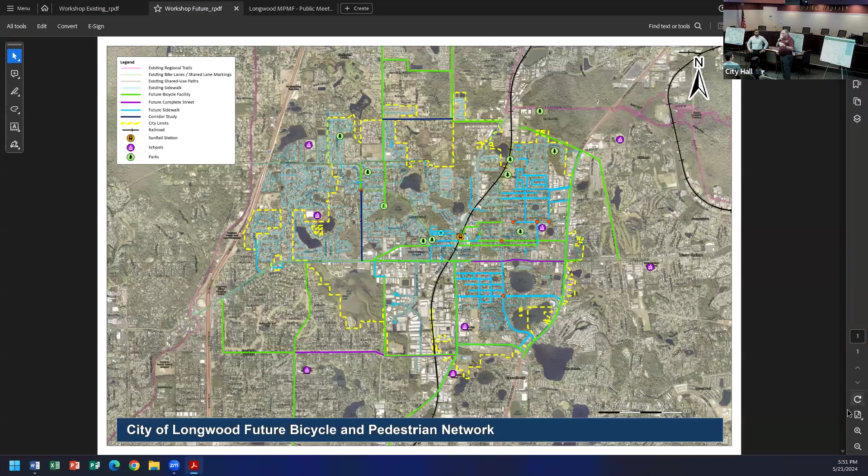But then there's also 2 copies of the mobility plan and one of the mobility fee report. It's a very detailed report, almost 200 pages. So you can look at those 2 at your leisure.

And like he said, we want to, after we're kind of done with some of the presentations, after Lauren speaks, we'll go have a little break before we come back and talk about the mobility fee. We're waiting for the other speaker. And during that time, you can maybe put Post-it notes on different things that you'd like to see or anything else.

One thing I did want to mention is we're coming to the end of our 1 penny sales tax and we're finishing up a lot of projects. So in the next year, probably 8 months, we're going to be finishing up a number of projects. There's some more sidewalk projects that we're doing right now.

In the next 6 months, some of them are, we're doing Florida, we're going to do some on Magnolia, we're doing some different sidewalk over on 14th and 12th. And then we're doing South Longwood Phase 1, and hopefully South Longwood Phase 2, which is basically all the streets from 434 south all the way to Wildmere and even over. We're making some of those connections.

If anybody's familiar, we're adding sidewalks too, and there's some other places we're trying to do sidewalk connections. If people have been around Longwood long enough, they know there's these neighborhoods that have sidewalks, but there's no connection from the sidewalk in the neighborhood to the road, like Range Line or to the church. So we're trying to add some of those little sections in over the next 8 months or so too. I just want to mention that, but I will introduce Lauren.

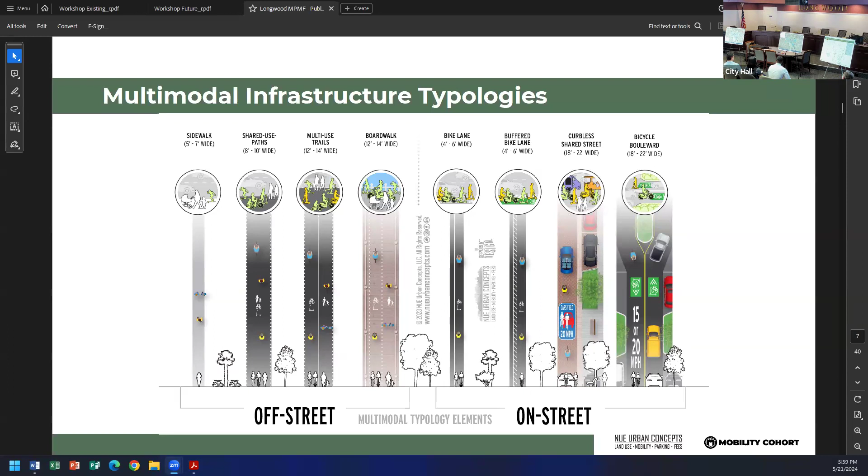And the idea is that between the bike ped plan and the mobility plan, the end result would be a well-connected and integrated multimodal system that allows people to move around Longwood with or without a car.

And so when we talk about moving people, this is what we mean. We've seen a wider and wider variety of mobility devices and ways in which people are moving around cities these days, and we want to encourage that. We want to accommodate that because when we do, it makes for a more sustainable and a safer street environment for everyone.

But it also provides more independence for people that otherwise wouldn't have much independence in a car-focused society, right? So we're talking about people with disabilities. I actually lived in the Netherlands for a few years, and one of the most striking things to me was that it's not just bikes using all of the bike lanes. People who would otherwise be very dependent on others to get around now have mobility because you're providing multimodal facilities for them to use.

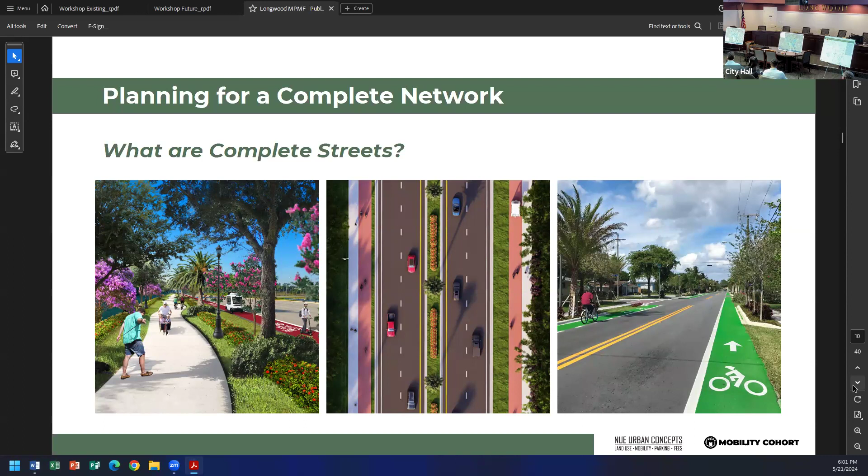And so to get into some of the proposed projects, we did include a few projects that had been already identified on state and county roads through other plans. Those are mostly included just to emphasize those projects and to show the importance of the connectivity that they create for the multimodal network. So you have what we call complete street retrofits.

So that would be a street that is an existing street, but it's being reconstructed to add bike lanes, add a shared use path, et cetera. And so there are already some projects in the works for Ronald Reagan, 434, and 17.

In addition to those projects, we've recommended 2 new complete streets, and one is the extension of Savage Court and Bennett Drive. It looks like some of these maps aren't turning out too well on this, so I apologize for that, but I'll get into that a little bit more here in a minute.

We've also proposed 2 additional projects, 1 additional trail project and 1 additional shared use path. We didn't look too much at paths and trails because, as I mentioned, we've incorporated the bike ped plan into the mobility plan, and you guys had already made a lot of great recommendations, so we didn't have too much to add there.

But one thing we did discuss with Shad was the opportunity to add a trail on the east side of Candyland Park. There's some extra right-of-way that could lead from Arbor Dog Park down to Longdale. But it would provide some connectivity and we think could be a nice amenity for the park there.

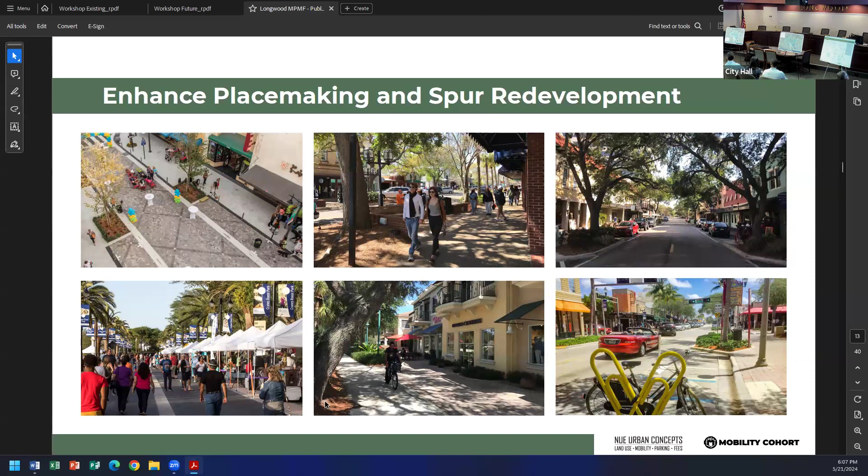So this is what we envision in Longwood. We've proposed curbless shared streets on West Church Avenue and Warren Avenue between West Church and Ronald Reagan, as well as Wilma Street, right outside. Again, this is a long-term plan. These streets are already some of the more aesthetic streets in the city, and they're right adjacent to Reiter Park and the hospital site, which will be redeveloped. We strongly believe, and have seen in other communities, that streets like this can do a lot for redevelopment and placemaking.

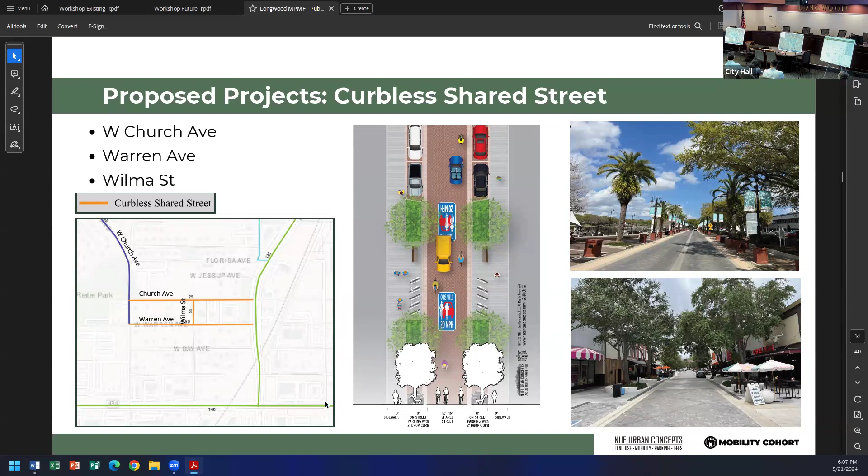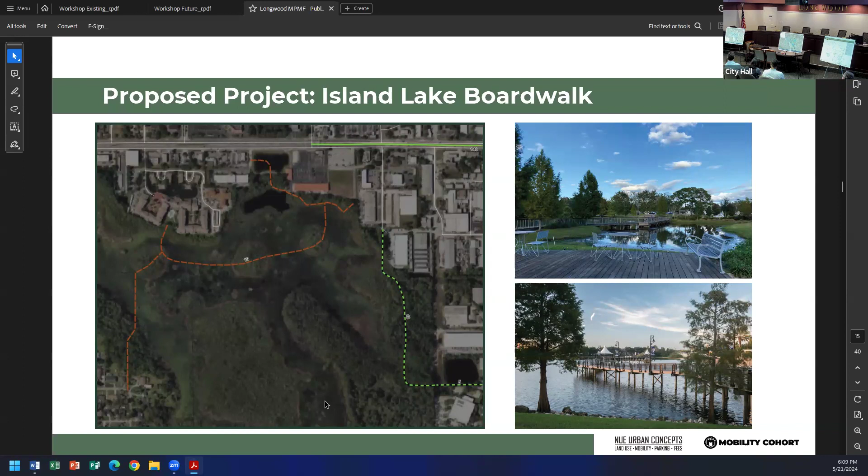The mobility plan also addresses parking. We've included a catch-all project, which would allow the city to develop up to 40 on-street parking spaces throughout the city and in the downtown area.

I can talk about that in more detail with everyone, but some of the idea behind that was that when you are looking to redevelop historic downtowns, the city has parking minimum requirements. And if a small business owner comes in and wants to develop just one lot, sometimes the parking requirements can be a barrier to being able to do that. Sometimes it's difficult to provide parking. So if the city can provide its own parking in the downtown area, then that could be used to satisfy some of the parking requirements. Long story short, that's a big policy barrier with creating more walkable communities.

We've also created a catch-all project that we're calling Strategic Parking Management. This would allow the city to begin collecting funding to address anything from site acquisition, design, engineering, and construction of various parking improvements in the Station Core and Downtown Historic District.

This is accompanied by a recommendation for a next step initiative to do a parking management plan. That plan would look in more detail at what are the parking needs downtown, how can we create first and last mile solutions to the train station, how can we connect multimodal facilities to the train station, and also how can we create a park once environment. By park once environment, we mean when people come into Longwood, say for an event or whatever it may be, they could park one time and use other means to travel around the city.

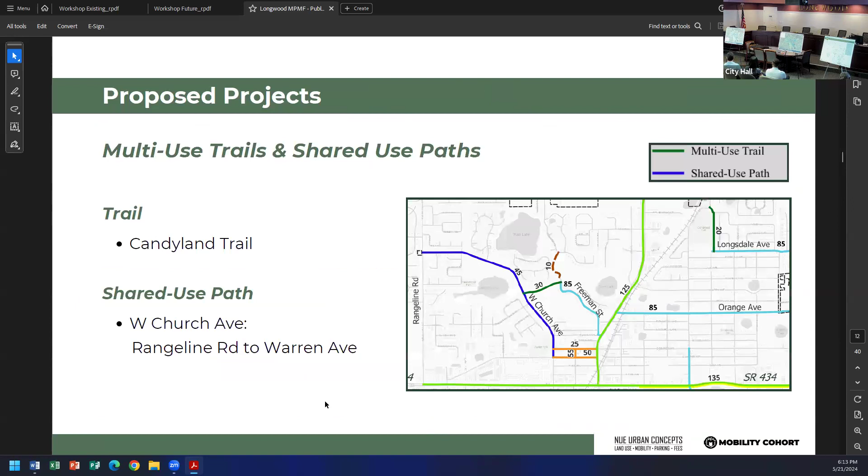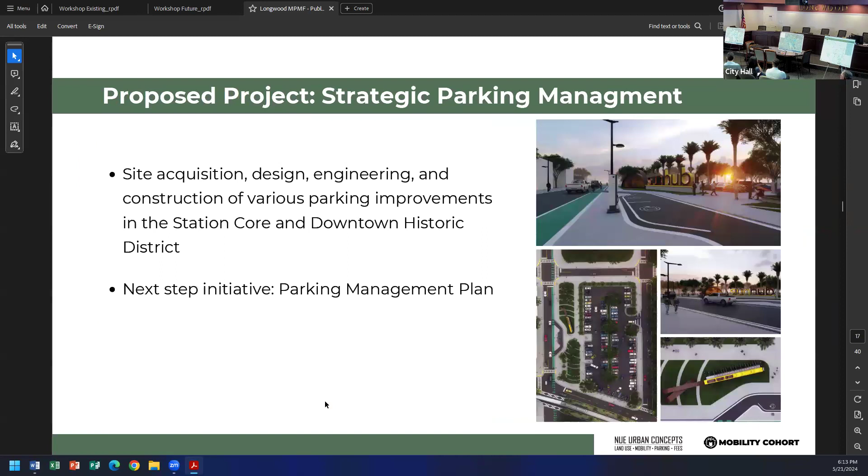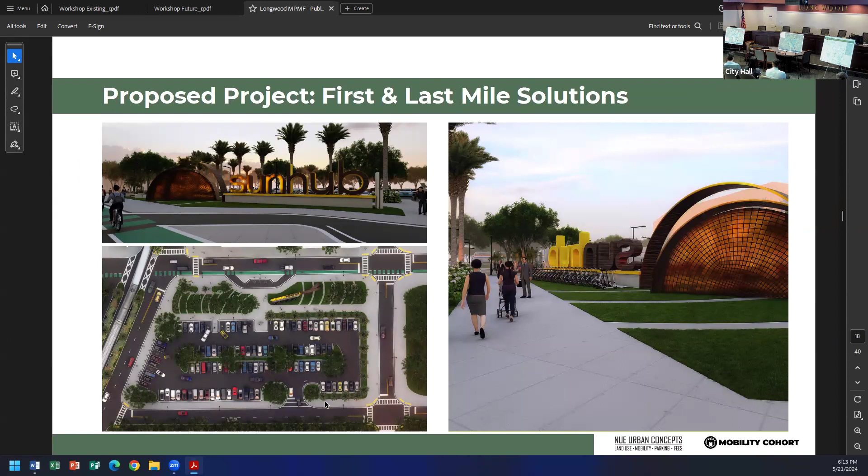I had a picture of it here, but I don't know if I can go back that far. In the bottom right, this is a microtransit circulator. These are becoming more and more popular in communities in South Florida. They're essentially large golf carts, operating as transit services in some communities. We thought that could be a cool idea for Longwood, something that could start as a service for special events, and then as redevelopment occurs, if it's successful, it could be expanded into a more regular service.

We talked about how the mobility plan can be leveraged to create and enhance public space in the community. We have Reiter Park, the historic downtown district, we may have Island Lake boardwalk, and then we also have the train station, the Sunrail area. It's important to ensure these areas are connected to each other and that people can reach these key destinations in the city from residential areas. So we wanted to look at how do we improve the multimodal accessibility throughout the city.

When you look at Longwood on a map and look at the transportation network, you'll notice that in the older part of the city, east of Ronald Reagan, you have a nice gridded street network. West of Ronald Reagan, this is the part of the city that was more recently developed, and you have more of a suburban style transportation network. This is something we call modern curvilinear, with curving streets, dead ends, and cul-de-sacs.

From a transportation planning perspective, the modern curvilinear has some benefits, but from a traffic perspective it also presents issues. When you have less connectivity in your grid network, you're forcing a lot of traffic onto just a few streets, your collectors and arterials. That's when you get traffic, because everybody's taking the same route to their destination, as compared to a traditional grid network where you have many options of getting from A to B. The traffic is more dispersed, and you generally have better traffic flow.

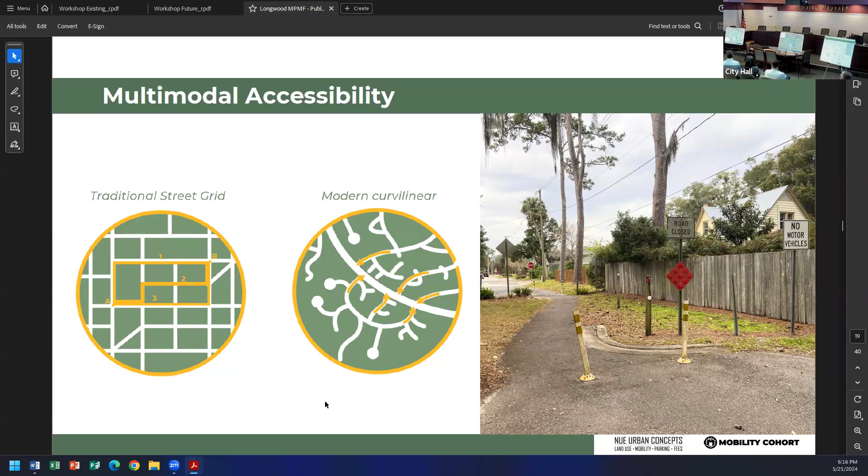The picture on the right is an example I took from Gainesville of what that could look like. So instead of keeping the street or opening the street, you could just put a trail. And I'll show you why that matters. These are two projects we've proposed with that goal in mind.

The first, and I apologize, the map is not rendering very well. Let me see if I have a pointer here. The first project is number 10, and that goes from Bucksaw Place and Hidden Oak Estates to Freeman Street. We've proposed that as a boardwalk.

The reason we've proposed it as a boardwalk is because it runs through some conservation areas. Boardwalks are known for being lower impact development and more environmentally sensitive. So we think this could be a good location for a boardwalk.

If you live in Hidden Oak Estates, or another neighborhood to the north that I don't know the name of, you have to go all the way up to Longwood Hills Road and all the way around to Ronald Reagan if you want to go down to Reiter Park, the train station, or the hospital. That's about 1.5 miles or more drive. If you open up that boardwalk connection, that cuts the distance down to half a mile.

So now you're talking about a walkable or bikeable distance. That was the thinking behind that project, that as this area we're standing in right now redevelops, and as we enhance the area around the train station, we would want to shorten the distances it would take to get there so we can encourage people to bike and walk more.

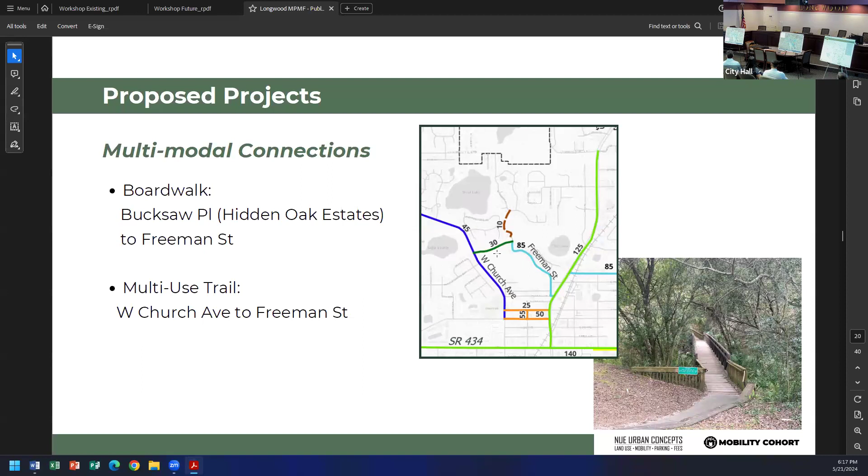So we talked about how the mobility plan creates a framework for innovation and thinking differently about how we design our streets. I know some in the room are familiar with roadway level of service, others may not be. Just as a quick summary, roadway level of service is the traditional methodology that planners and transportation engineers use to evaluate deficiencies, evaluate the roadway system, and prioritize what projects get built. But roadway level of service is focused on service for cars and doesn't pay much attention to multimodal travel, what it's like to be a person walking on the street.

This having a methodology focused on roadway level of service has created a planning system where we are very focused on widening roads and building new roads as a solution for congestion. And what many of you may have experienced in your own lifetimes is that this brings induced demand.

So when you widen a road or build a new road, a few years later you're sitting in congestion again, and you have the same problem. So as planners, we're starting to recognize this and think differently about how we can plan to solve congestion. The Florida statute recommends developing quality of service standards in conjunction with mobility plans. For the city of Longwood, we've developed street quality of service standards, which can be used in conjunction with level of service. This is really for the transportation geeks in the room. The quality of service standards are focused on how safe a street is for all road users rather than how many vehicles the street can move. When you transition the focus to safety, you open up a new framework for designing roads differently, accommodating multimodal travel, and it makes it easier to design streets differently within the planning and policy framework.

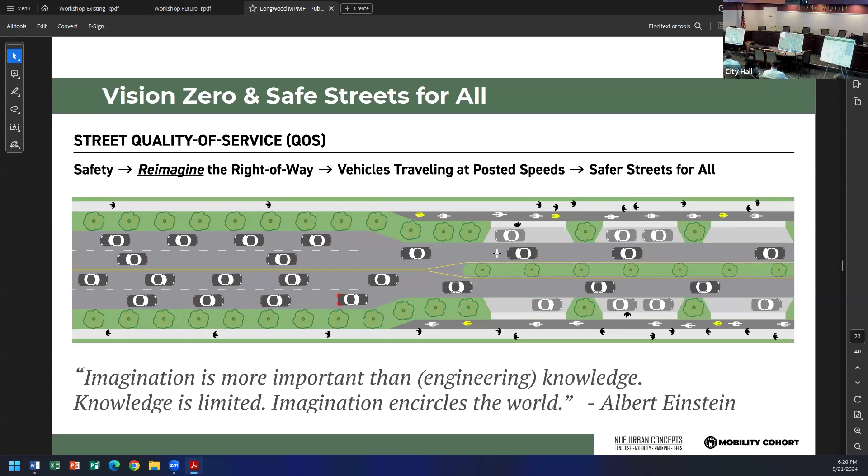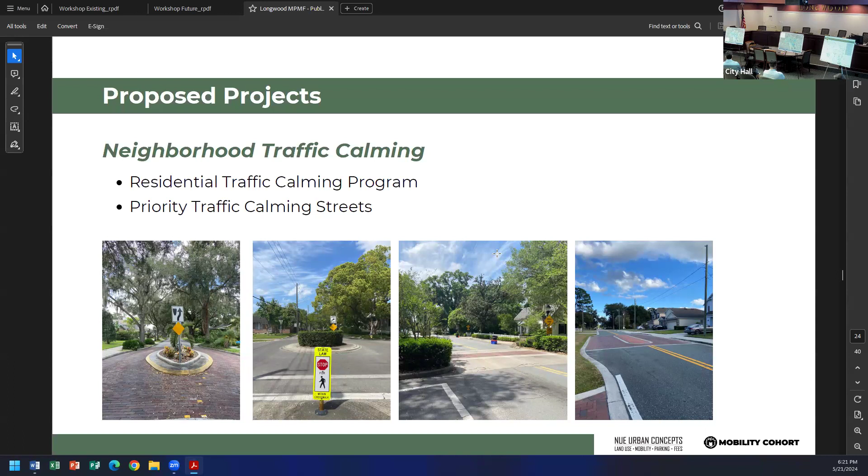On that note, the plan proposes a number of projects related to safety, including a residential traffic calming program. We've also identified some priority traffic calming streets that the city should first look at when they implement that program, which would look at what kinds of improvements the city can implement for traffic calming. You'd see things like chicanes in the bottom left, mini traffic circles, and speed tables. You already have some examples of traffic calming in Longwood, but this has a really great impact on making streets, especially residential streets, safer for people.

I'll point out the railroad safety study, because I know we have at least one person in the audience interested in that. The idea is that Georgia Avenue is a pretty dangerous crossing—there have been some issues with that railroad crossing, including cars that have been hit by trains at that location. So we think it's important for the city to undergo a study to look at whether that crossing needs to be closed, and if so, where we'd put another opening. Maybe it doesn't mean a closure—maybe it just means we need some additional safety measures there. But it's clear to us that it's something that needs to be addressed, so happy to talk about that in more detail with anyone.

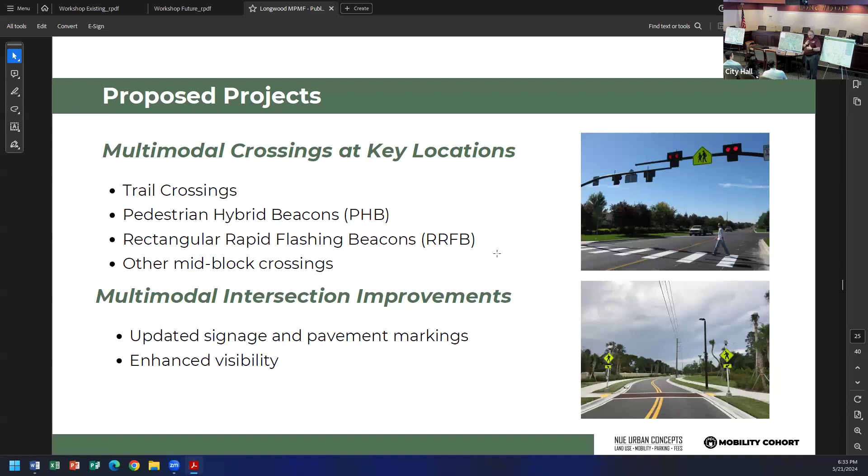That's part of what she mentioned, that it's a study, because we need to look at that. Do we do a full closure? Do we only allow ped crossing closure? Is it only eastbound versus westbound? Because part of the problem there is even a school bus comes over and has to stop, they're actually almost sticking over the railroad track as they're going westbound. So you run into issues because it's so close, the queue is so short.

And so that's part of what you'd have to look at, and we'd have to get with Sunrail and FDOT, and eventually it comes back to CSX still has some rights through there, and whether or not we could try to maybe move the railroad crossing. That's part of our thoughts, is try to put it on the other side of town, like over in the industrial area, and try to do a crossing over there.

Because we have Orange and we have Palmetto and even Church, and then you also have Georgia, and Georgia's the problem one, and we've known about it for a while. So that's what the study needs to do, and that's part of the next steps of why it's in the mobility plan.

Mhm. And we have recommended.

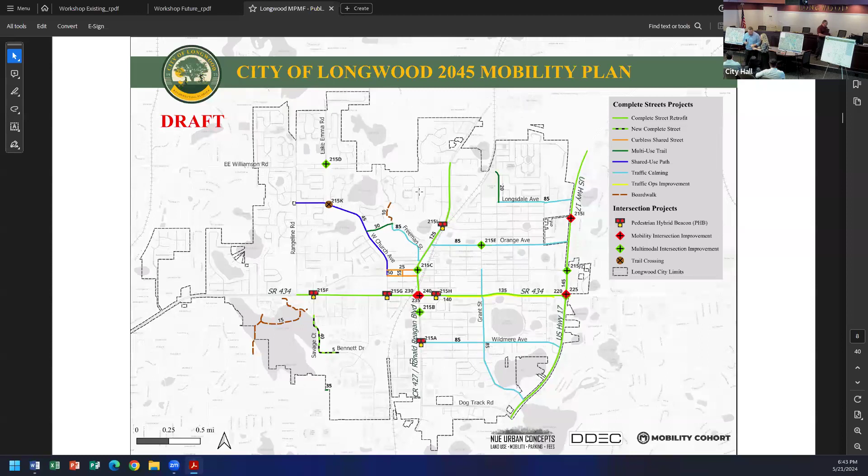My name is Jonathan Paul. I'm the principal of NUE Urban Concepts, and Lauren's been working with the city here for over a year now developing the mobility plan. It's kind of the exciting part of all this, and now we're going to talk about a very technical subject: mobility fee.

Does anybody know what a mobility fee is? Well, any of the residents know what the mobility fee is?

Absolutely, that's perfect. Yes, some people do refer to it as a tax, but it is not a tax, because it's not something that's levied on existing homeowners or existing businesses. It's only for new development, and it's only a one-time charge.

So when a new project comes in, like the hospital reconstructing and building a building there, they would pay a mobility fee. They probably paid a mobility fee to Seminole County. If you're coming in putting in a gas station, a fast food, a new residence, you would pay a mobility fee to help fund the projects on the mobility plan, to help fund the bicycle projects.

Right now the county charges a mobility fee within the city of Longwood, and the county has the ability to spend that money anywhere in Seminole County. They don't have to spend the money, so they collected money from the hospital, but there's no requirement that they spend that money in Longwood. They could spend it in Sanford, Oviedo, Altamonte, they can spend it anywhere.